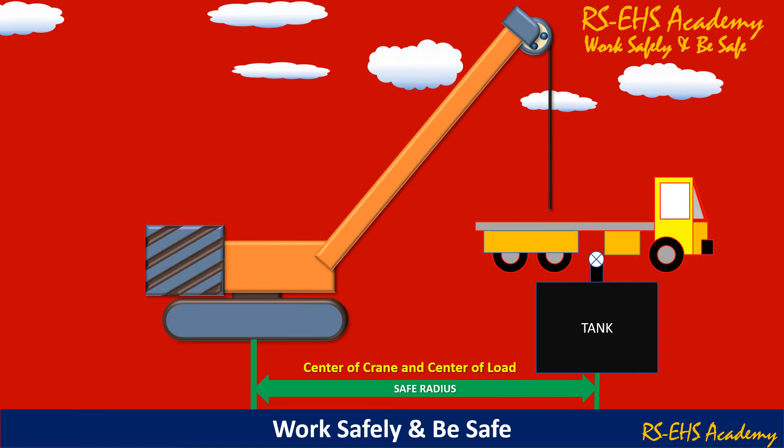Let us see scenario 1. What can happen if TBRA is not done? An open tank was to be lifted and shifted with the help of a crane from the tank foundation to the nearby parked truck trailer. The crane reached the job site and slings were fixed to the tank for lifting. But during this activity, suddenly heavy rain started and continued the whole day and night. Hence, the job was postponed to the next day.

Next day, the crew reached the job site, as the job was already made ready the previous day to lift. Hence, the crew started the lifting and shifting job of the tank. While lifting the tank, the crane got imbalanced. The tank started swinging, got detached from the crane and fell down to the floor.

Let us understand what went wrong. Task-based risk assessment was not done. The tank got full with rainwater the previous night and it was not checked before lifting, and its weight became more than the crane's capacity. Water also put a dynamic jolt while lifting. The tank did not have any drain point, which could have prevented the incident if left open. Means TBRA could have identified such hazards and the incident could have been prevented.

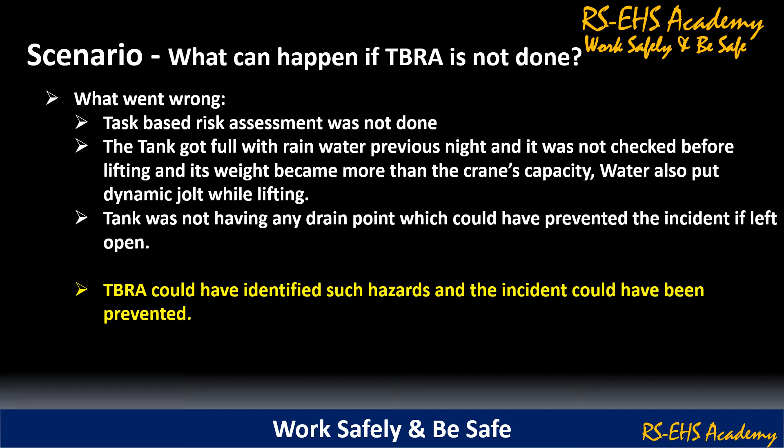Now let us understand what is risk. Risk is the probability of any hazard to cause damage. In terms of formula, it is exposure to the hazard multiplied by severity of hazard and multiplied by probability to cause damage. Let us take one example.

A person standing under a suspended or hanging load lifted by a crane is under risk of serious injury if the crane fails and the load falls on the person. Here the exposure to the suspended or hanging load E, severity of injury S and probability of crane failure P are considered to calculate the risk R of injury.

Examples of hazards and risk. Task is changing rotary cutter. Hazard is sharp edges of cutter blades. Risk is cut injury by the blades. Another task is MCC switching. Hazard is arc flash and risk is burn injury by arc flash.

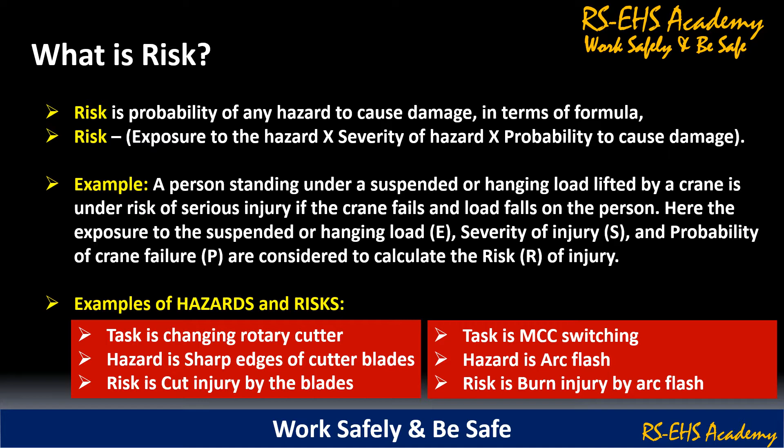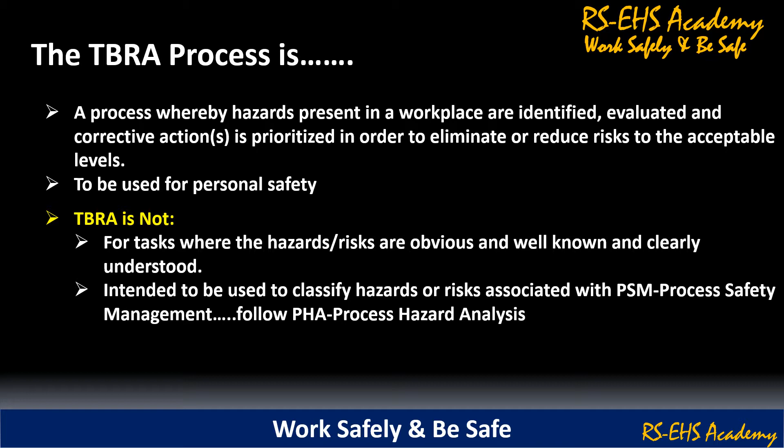Let us understand the TBRA process. A process whereby hazards present in a workplace are identified, evaluated and corrective actions are prioritized in order to eliminate or reduce risk to the acceptable level, and to be used for personal safety also. TBRA is not for tasks where the hazards and risks are obvious, well known and clearly understood. Intended to be used to classify hazards or risks associated with process safety management, which is followed by PHA, process hazard analysis.

Benefits and strengths of TBRA: eliminates most serious hazards, fulfills regulatory and policy requirements, involves teams from all levels in the organization, focuses on the actual work activities, improves awareness of hazards and/or identifies new ones, ensures that the correct control measures are in place and reflected in proper job procedures, continuously improves safety management systems and conditions of work, and reduces safety incidents.

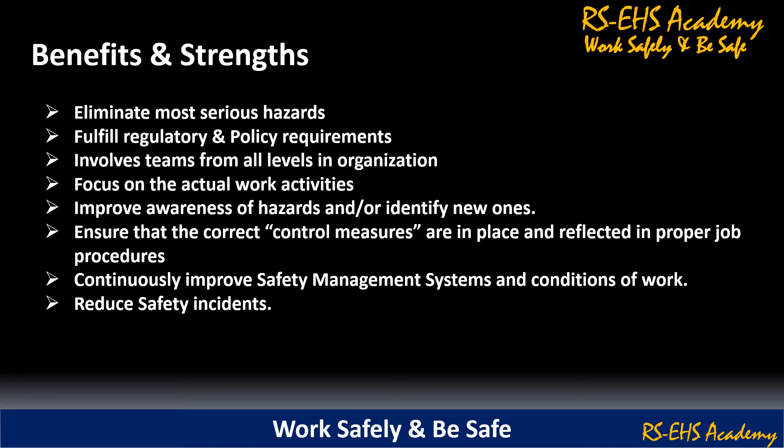When is TBRA required? TBRA is required when proper safety procedures are not in place, existing procedures are not adequate, when a new job, task, chemical and/or machine has been introduced, new or different people are doing the task, change in specific regulatory standard or company policy, unplanned work, to continue work after an incident or injury has occurred, and as a result of medical surveillance.

When is TBRA required? Let us go through a few examples. You must do TBRA for high pressure cleaning, confined space entry, line break, working at height, deviations from safety procedures and SOPs (standard operating procedures), rigging and hoisting, hot work involving flames and sparks, a new task or new job, etc.

And TBRA is suggested if details of the task are not known, dangerous chemicals are involved, other tasks are in the same area or there are conflicting tasks, contractor work, the task takes more than 2 hours, the task is done during the night, the task has more than one person, there is no barricaded area, or you are not familiar with the job.

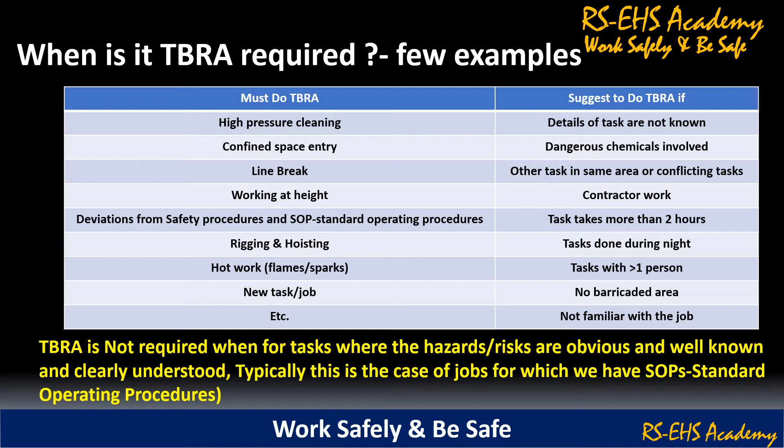How can TBRA help prevent incidents? Risk assessment is a systematic and structured process whereby hazards present in a workplace or arising from workplace activities are identified, risks are evaluated, and protective and preventive measures, including procedures and practices, are put in place to reduce risk to the acceptable level. By performing risk assessment, we can identify the controls required for bringing the risk down to acceptable levels and thereby making the task safer.

Here, the point to note is to always remember the principle of elimination, segregation, enclosures and PPEs, that is, give a thought to whether the task can be eliminated or substituted by a less hazardous approach.

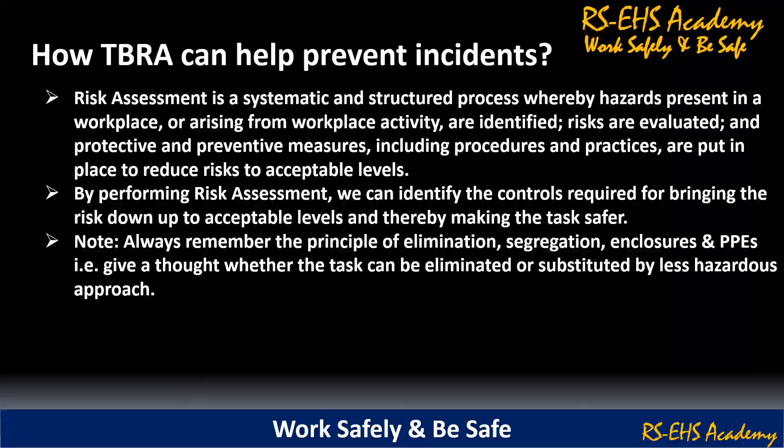How is TBRA performed? Risk assessment involves systematic identification and assessment of hazards with respect to their potential to cause harm along with its probability. The risk analysis is based on the following 7 steps. Step 1, description of task and subtask. Step 2, identification of people exposed. Step 3, identification of hazards.

Step 4, assessment of the initial risk. Step 5, description of the control measures. Step 6, assessment of the actual risk. And finally, Step 7, assigning priority to the measures.

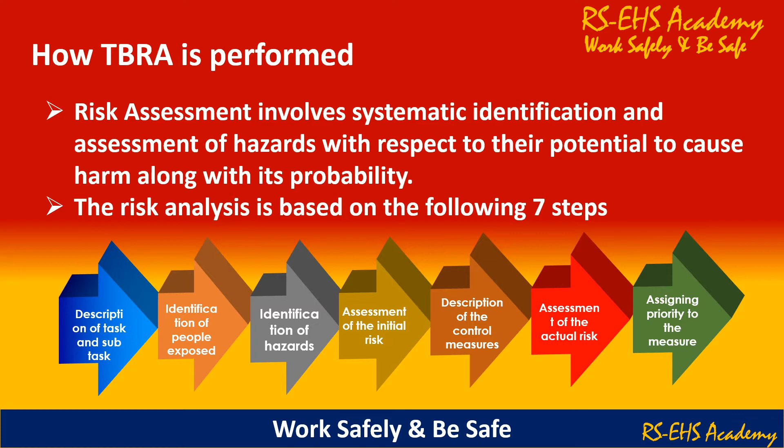Preparing for TBRA. Risk assessment is best done by a group of people with multidisciplinary participation. Generally, 5 to 6 is a good number. The higher the work experience of participants, the better the quality of the risk assessment. Involvement of the executing agency is highly expected, including contractor supervisors and workers. It is recommended to involve experts for those jobs, specific equipment or specific chemicals involved.

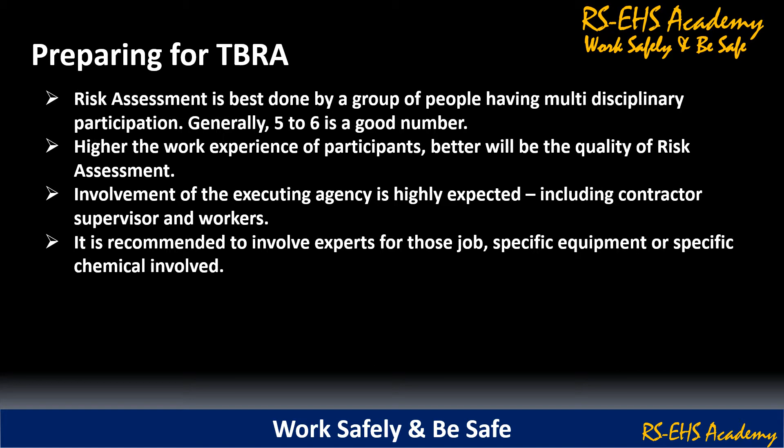Gather information about the job. First, gather information about the job such as what is the job, where is it to be done, when and how long is it to be done, how is the job to be done, who all will be doing the job and what are their skill levels, what equipment and tools are required for the job, with whom interactions and communication are required and what are their responsibilities in the execution of the job, what area preparation is required, and are job procedures available with all persons involved or is anyone new to the job.

Step 1 of the TBRA process, that is, description of task and subtask. Identify task and subtask. Define boundaries of the task. The breakup should be able to identify hazards in the task. Keep in mind the skill level of persons carrying out the job. What is a hazard for one skill level may not be a hazard for another skill level. A job site visit is a must. Job site considerations should be part of the risk assessment.

The supervisor responsible for the work should write the steps. Don't break it into very minute activities, for example, operator goes and picks up a valve key. At the same time, don't make it too big in scope, for example, hand over pump to maintenance.

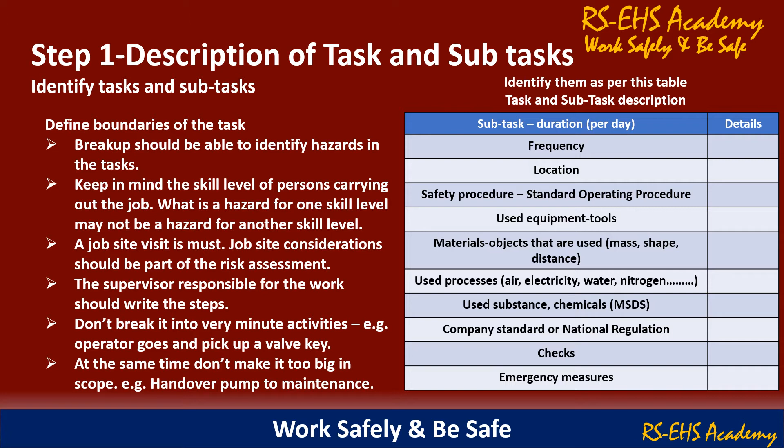Step 2 of the TBRA process, that is identification of people exposed. Identify people exposed means person executing the job, other people involved, persons who run a higher risk: handicapped, aged, pregnant, young mother, space without or with inadequate ventilation, maintenance personnel, bad health and medication.

Competency of the person executing the task, that is training and experience. Different people may have different risks in the same job. Example, an aged person may have higher risk compared to a young person for specific hazards.

Step 3 of the TBRA process, that is identification of hazards. Identify the hazards. All hazards related to physical, chemical, ergonomic, biological and environmental. All hazards related to action means behavior of the person. Tools being used means nip points, projectiles, weight and size of the tools, etc. Equipment involved means electrical, pneumatic, hydraulic, high pressure, etc.

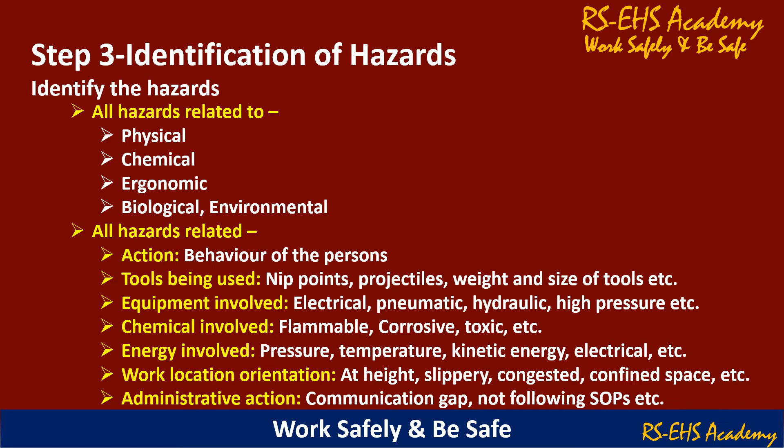Chemical involved means flammable, corrosive, toxic, etc. Energy involved means pressure, temperature, kinetic energy, electrical, etc. Work location orientation means at height, slippery, congested, confined space, etc. And administrative action, that is communication gap, not following SOP, etc.

TBRA process. Step 4. Assessment of risk. Assess the initial risk. This assessment will show what the real level of risk is that we want to manage via all controls, that is procedures, rules, tools and equipment, PPE, etc. Risk is exposure multiplied by severity multiplied by probability.

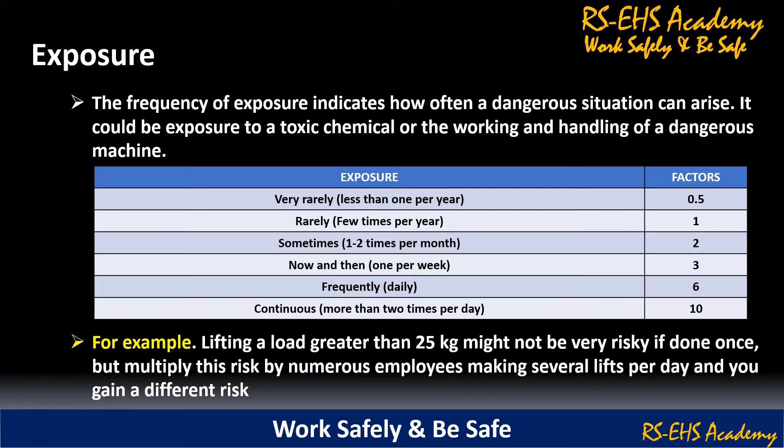Severity. The apparent effect indicates the seriousness of the arising situation. Severity and factors. Minor injury without time or work restriction, that is first aid case, factor will be 1. Minor injury with time or work restriction, medical treatment case, restricted work day case, factor will be 4. Serious irreversible effect, handicap, lost workday case, factor will be 7. Critical, single fatality immediately or afterwards, factor will be 15. Disaster, multiple fatalities immediately or afterwards,

factor will be 40. For the initial risk, don't take the effect of PPE or any other control measures or procedures in evaluating the severity of a certain event, equal to the worst case scenario. For the actual risk, take into account the control measures taken, determining the realistic maximum severity factor, equal to the practical case scenario.

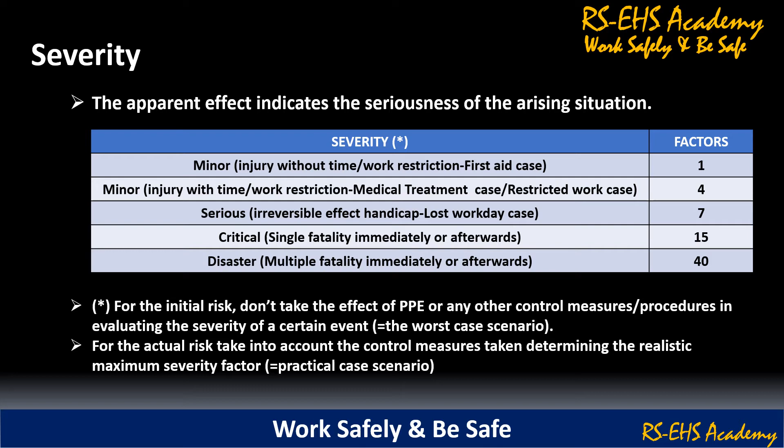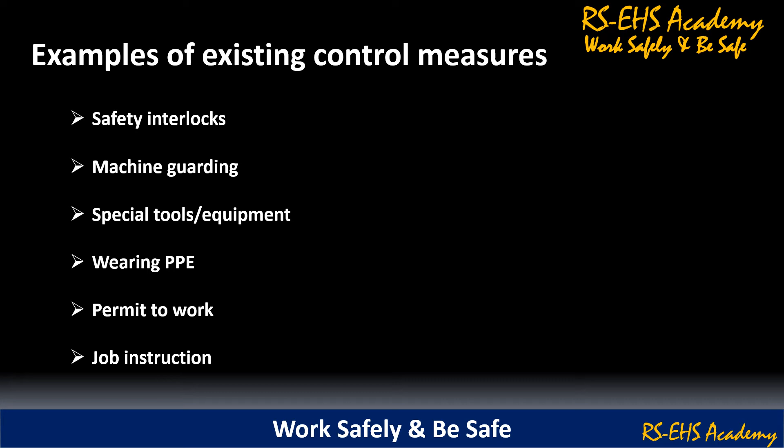Examples of existing control measures: safety interlocks, machine guarding, special tools and equipment, wearing PPE, permit to work, and job instructions.

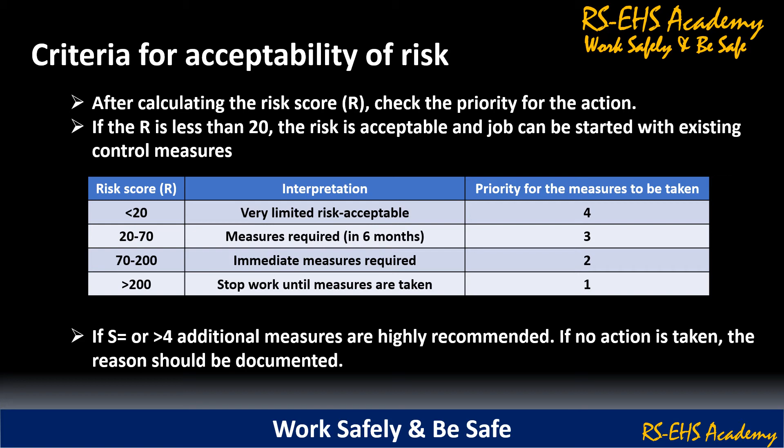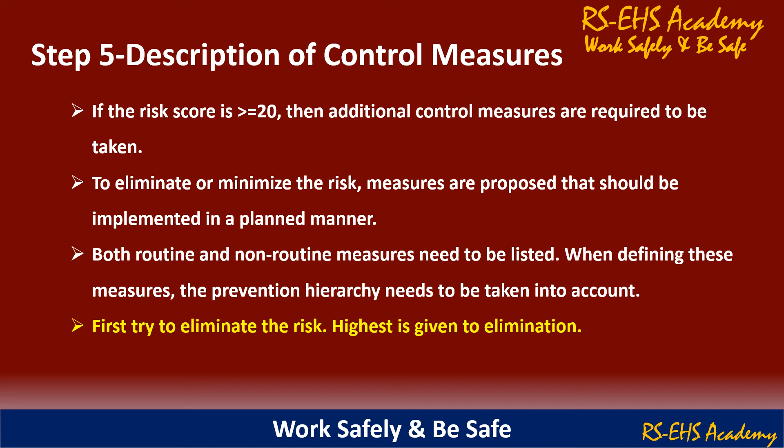TBRA process step 5, description of control measures. If the risk score is more than 20, then additional control measures are required to be taken. To eliminate or minimize the risk, measures are proposed that should be implemented in a planned manner. Both routine and non-routine measures need to be listed. When defining these measures, the prevention hierarchy needs to be taken into account. First, try to eliminate the risk. Highest priority is given to elimination.

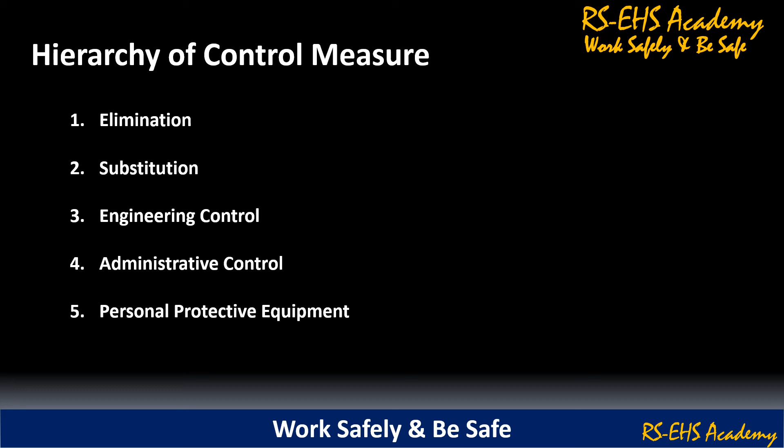Hierarchy of control measures. First is elimination, second is substitution, third is engineering control, fourth is administrative control, and fifth is personal protective equipment. During the TBRA process, if actual and residual risk comes, then the task can be done safely or needs further risk reduction for the work.

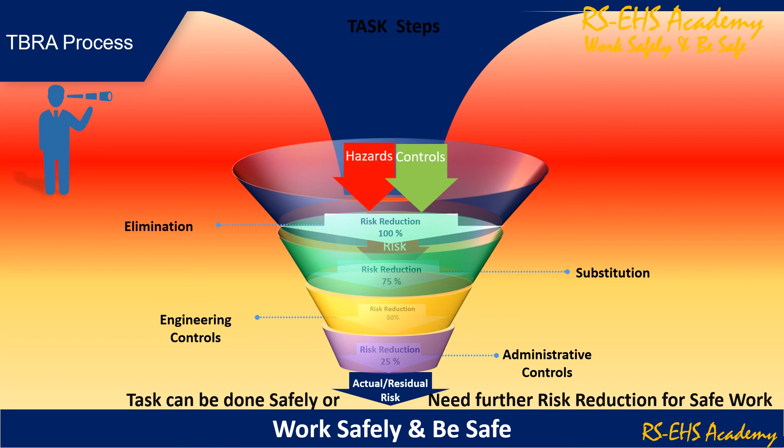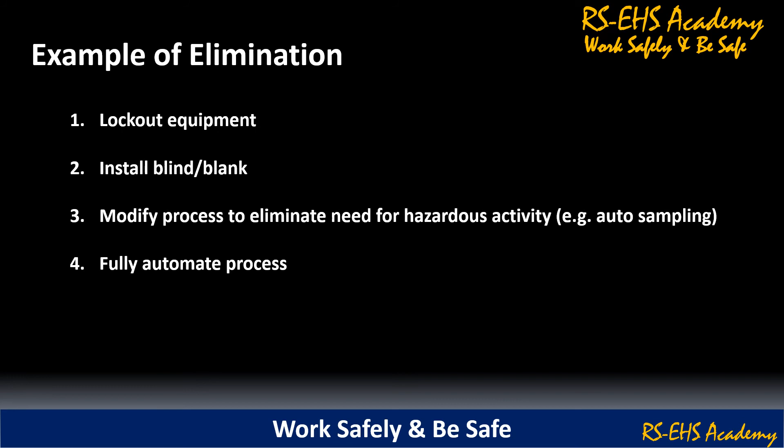Example of elimination. First is lockout equipment. Second, install blind blank. Third is modify process to eliminate need for hazardous activity, that is auto sampling. And fourth is fully automate process. Example of substitution. Use alternate materials, for example, lower flash point. Use tools instead of handling with bare hands. Use trolleys and trucks instead of carrying by hand. Automate process.

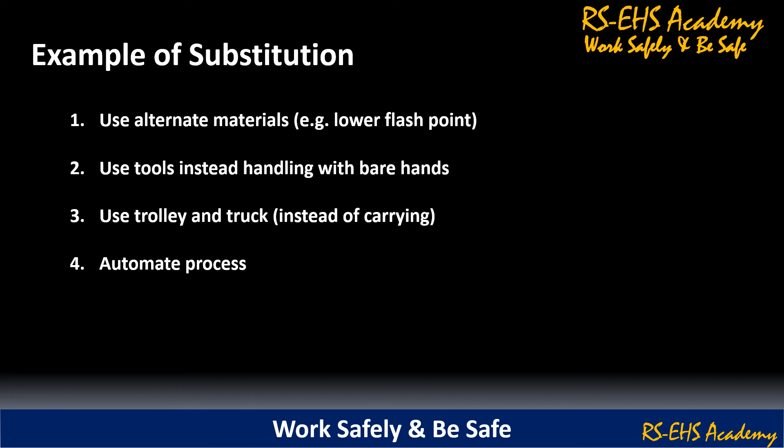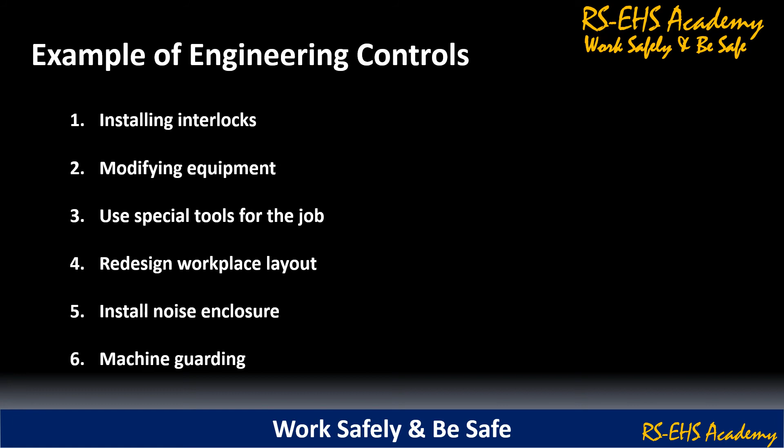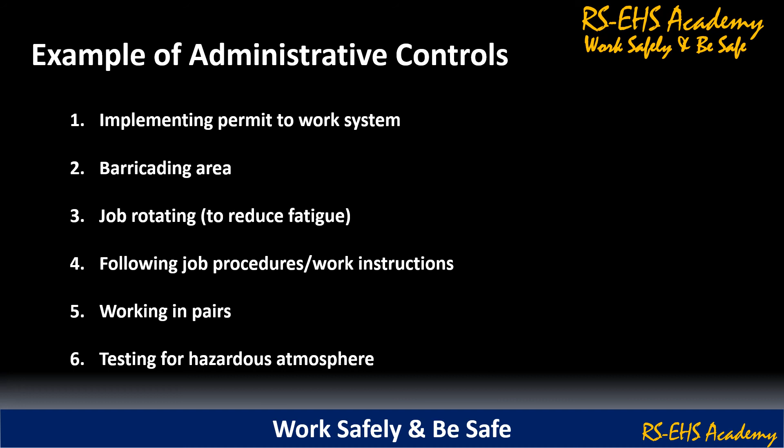Example of engineering controls. Installing interlocks, modifying equipment, use special tools for the job, redesign workplace layout, install noise enclosure, and machine guarding. Example of administrative controls. Implementing permit to work system, barricading area, job rotation to reduce fatigue, following job procedures or work instructions, working in pairs, testing for hazardous atmosphere. Example of PPEs: wearing safety helmet, wearing Kevlar gloves, wearing Nomex coverall, wearing respirator.

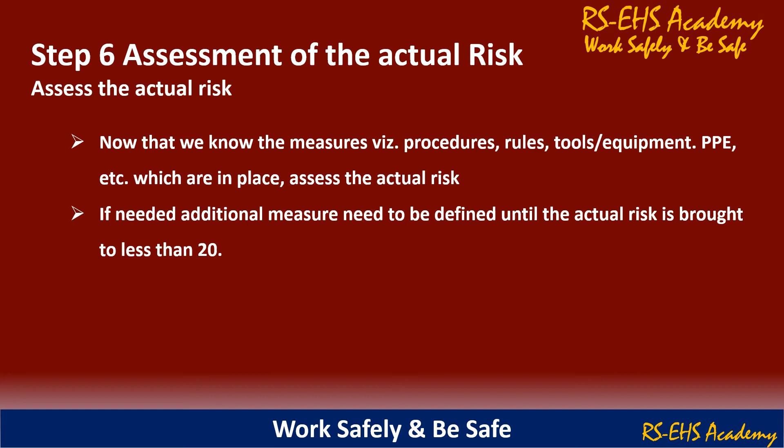Step 7, TBRA process. Assigning priorities to the measures. Classify into risk categories. Determine risk category after calculating the hazard score, thereby determining which possible urgent action is to be taken. Risk score, interpretation, and priority for the measures to be taken. If the risk score is less than 20, very limited risk, it is acceptable, and priority will be 4.

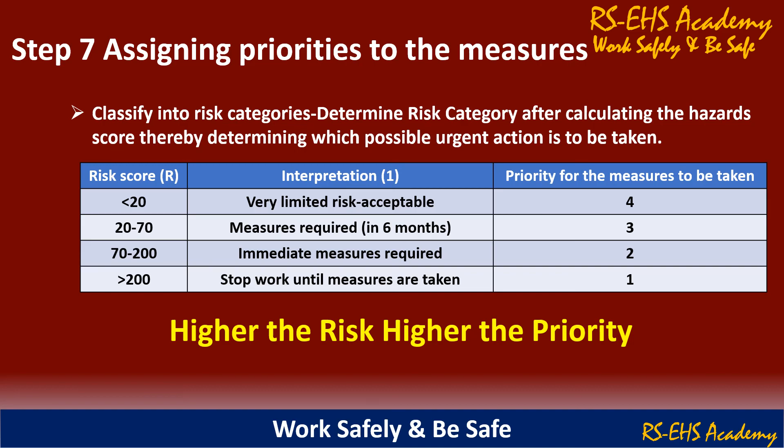If the risk score is between 20 and 70, measures required in 6 months, and priority will be 3. If the risk score is between 70 and 200, immediate measures required and priority will be 2. If the risk score is more than 200, stop work until measures are taken and priority will be 1. Higher the risk, higher the priority. Remember, prevention is better than cure. Work safely and be safe.